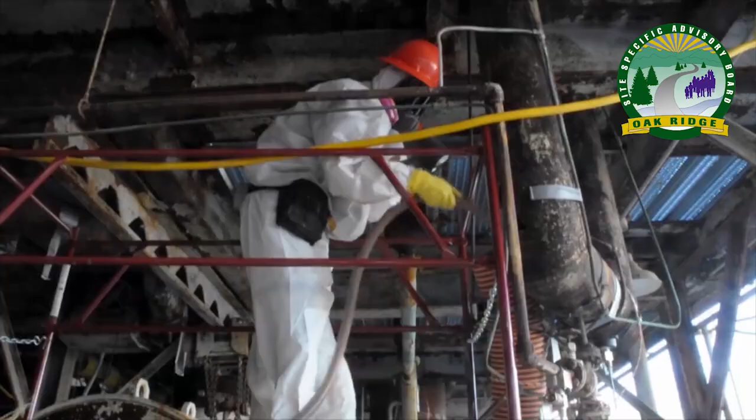The U.S. Department of Energy is cleaning up the Oak Ridge Reservation of residual hazardous and radioactive contamination left over as a result of decades of nuclear energy research. Much of that work has been influenced by the Oak Ridge Site-Specific Advisory Board, a citizens panel that provides independent advice and recommendations on DOE's cleanup operations.

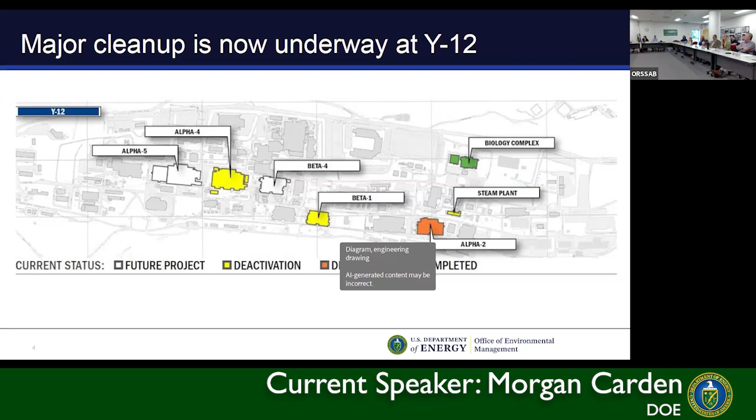That was constructed in 1949, around the same time frame as biology. It was created to perform experiments and collect data from low energy, potentially chain reaction assemblies. Our preparation for demolition activities started in July 2020, around the same time we moved our crews from ETTP to Y12 and ORNL. Our demolition started May 2022 and completed in December 2022.

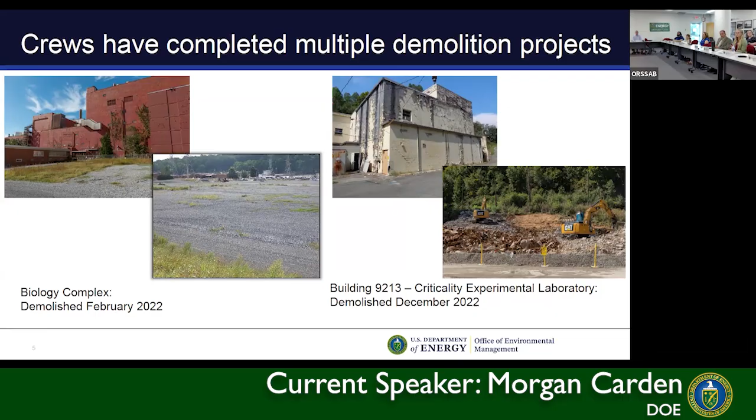Alpha 2 is our largest demolition project to date at Y12. It was originally constructed for uranium enrichment, but the mission, like many other facilities at Y12, changed over the years and it performed many different functions. This was constructed during the Manhattan era in the 1940s. In order to prepare this building for demolition, we had to do various activities.

We performed beryllium and asbestos abatement. We collected samples from walls, floors, all the equipment, materials, even the soils that were in the basement. We had to perform a lot of radiological screening due to the radiological contamination in the building. We also performed removal of loose, universal, and hazardous waste to reduce a lot of the risk before demolition activities could begin.

We also had to manage a lot of mercury contaminated piping in the basement. Before we could begin demolition, in order to condemn the building, we had to fill the basement with a low slump material - like a concrete material - which allows structural stability for our large heavy equipment to roll over in the building and fall onto it during demolition.

Also during our preparation for demolition activities, we worked hand in hand with NNSA and CNS to reroute above grade utilities. These utilities were active lines, and by rerouting them, we were able to allow NNSA to continue their active activities that were going on at the site.

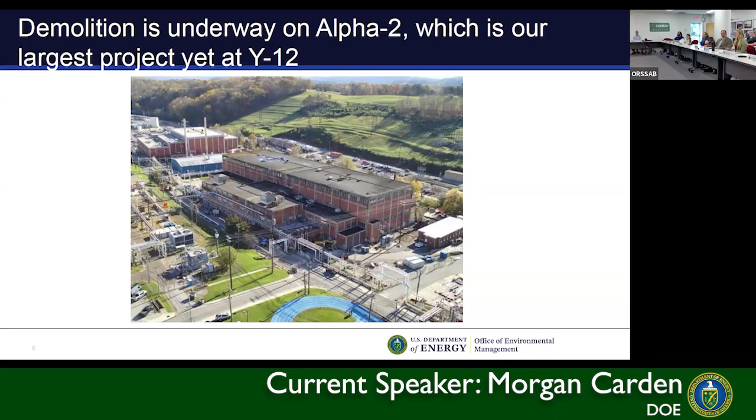So, as I mentioned, this building is undergoing active demolition. Our demolition activities began in September of 2024 with the demolition of a carpenter shop. It was on the west side of the building, a very small building.

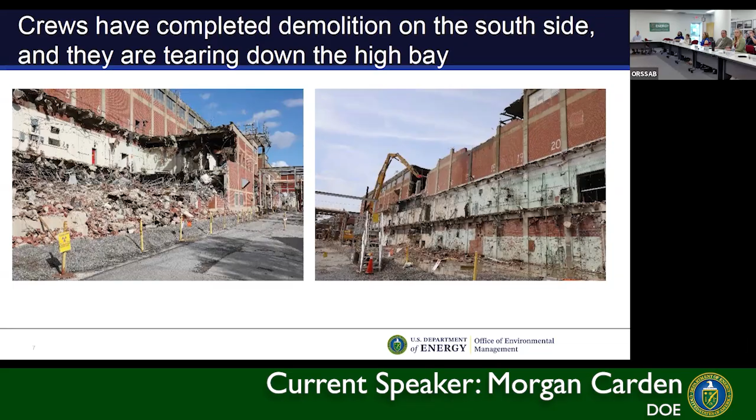As of today, the building has undergone all deactivation and preparation for demolition activities, and our crews are currently working on preparing the basement for demolition. This includes borescoping and sampling the pipes in the basement, removing hazardous and universal waste similar to Alpha 2. They're also isolating the pipes and drains that could possibly exit the building, because when we pour the low slump material into the basement, we don't want anything to exit it. They're also doing additional asbestos abatement and similar activities.

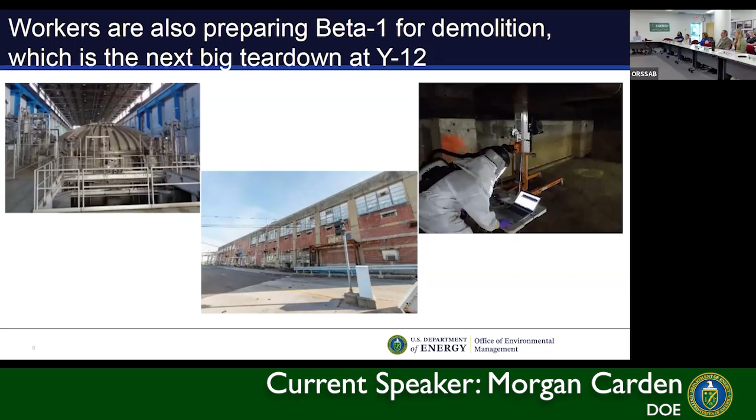The photo on the right is an example of one of our workers performing some sampling of the piping. It's called NDA—they're testing the radioactivity of the piping.

Our goal is to implement lessons learned from our deactivation and demolition activities at Alpha 2 and Beta 1 into these buildings, so we're well equipped for these larger, higher risk facilities. For comparison, Alpha 2 is 325,000 square feet, but Alpha 4 and Alpha 5 are 530,000 square feet—very large compared to what we're currently working on.

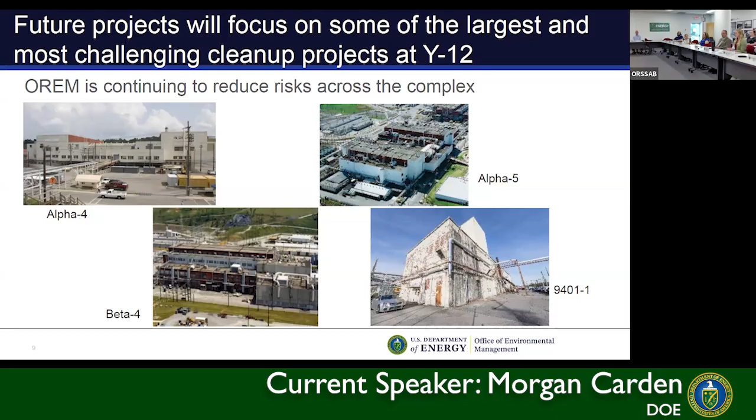And that's all I have. Does anyone have any questions?

Board members first. I got a question. Do we want questions now or after? Actually, could we wait until we get through—let Mike do his thing? Yeah, okay, sure, let them get through that. I'm sorry, Michael, would you go ahead? I'm Mike Gaskell, so.

I'm covering ORNL's transformation through the cleanup and deactivation demolition of our facilities.

Our first priority is to enhance safety by eliminating the high-risk facilities, reducing the environmental risk and the safety risk for the workers, for the public, and for the environment itself at ORNL.

But there's a process to get there. As you heard from Morgan, she went through some of the process steps at Y12, and we have the same process steps at ORNL.

Some of the process things we have to do include documentation like our RDR, RAWPs—the remedial action work plans—our waste handling plans, and our data quality objectives. These documents have to be coordinated and worked through with the regulators and with DOE to get approvals.

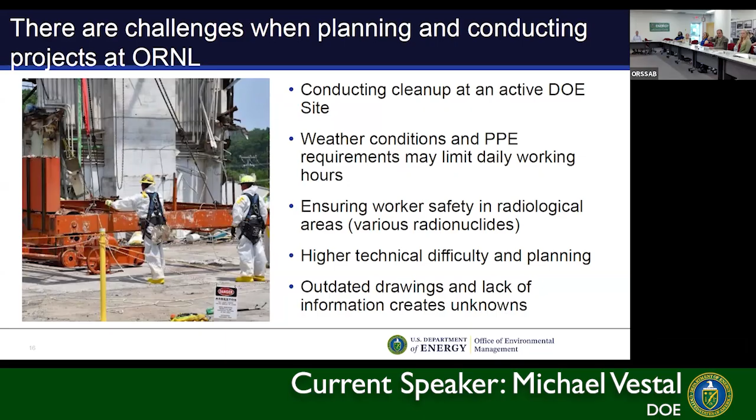All right. Some of the successes we've had so far on completed demolitions are the tritium target facility, which is in Bethel Valley, kind of toward the east end of Bethel Valley. And then 3026, the West Cell Bank. We're going to look at some photographs here in a few minutes of these facilities. A bulk shielding reactor, low intensity test reactor in 2023. And a lot of our prep for demolition, our deactivation work at the graphite reactor support facilities is ongoing, our isotope row facilities, the Oak Ridge Research Reactor Facility, and many hot cells.

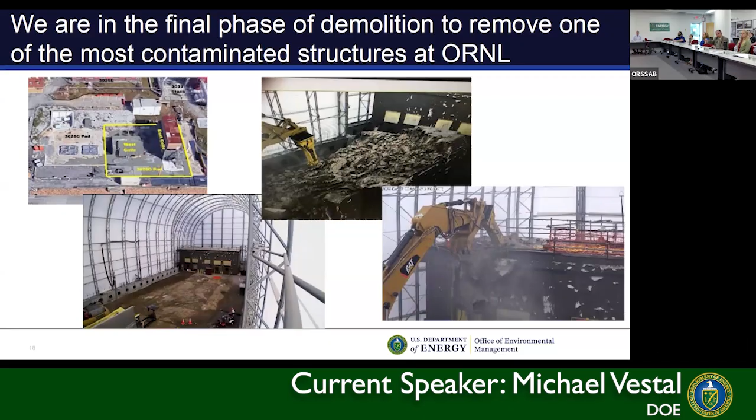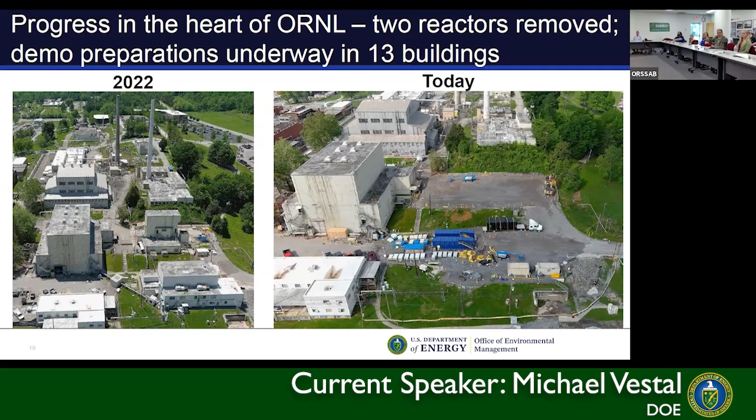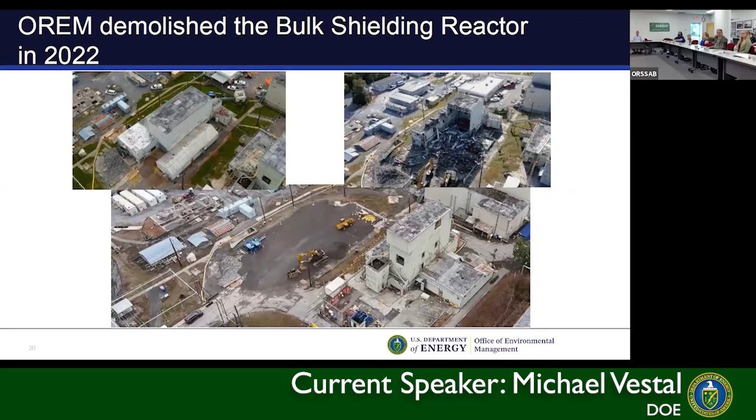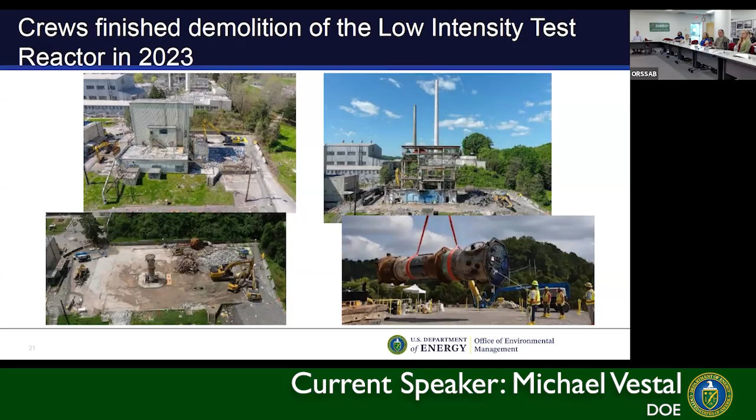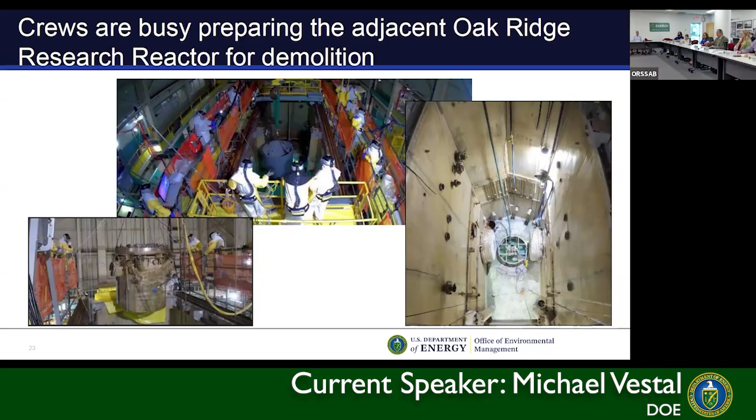So we're facing some challenges with this one as well. I think a source has been found inside one of the hot cells, so we're having to reactivate some of the manipulator arms or get some manipulator arms to where that source can be handled properly before they can complete deactivation in that specific building.

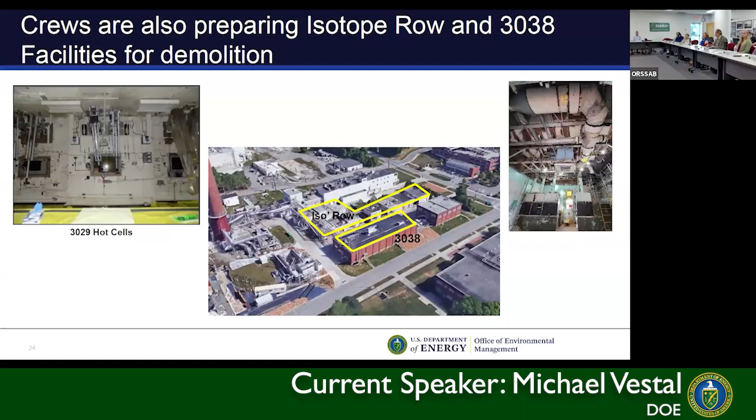Chris? I wonder, watching that, I know that the amount of water that's been pumped out at Rockwell is substantial. And talking about the pumps were out, and so those buildings were full. At ORNL, is that water table, is that as big a problem, or is it both sites show that?

At ORNL, we do have water, actually the Oak Ridge Research Reactor Facility has a sump pump in the basement there that is utilized to pump out groundwater stuff. So before they fill the basement up with the low strength concrete type material, that sump pump will be removed. But it is going to stay pumping at least until they're ready to fill the basement with the concrete material. We got another facility, the homogeneous reactor experiment.

It has water in the basement of it. I think it initially had a sump pump that was operated by the M&O contractor, UTB, but I think they were allowed to abandon that sump pump. So the basement basically filled up with water. So when we get to that facility, there will be those same type of challenges of having to deal with the groundwater, reactivating the sump pumps and pumping out the water.